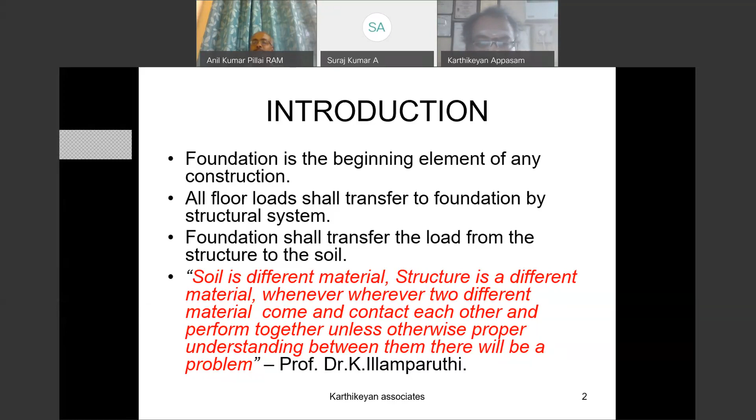How do foundations fail? Everyone does the Bhumi Puja with a lot of prayers while digging for the foundation and laying the foundation. The foundation laying ceremony is as important as the building inauguration ceremony. Nowadays, you may see most political leaders participate in foundation laying, stone laying ceremonies. So people are very serious about the value of foundation in a mythological and religious way. They make prayers on the foundations, but still there are some failures of foundations.

How does it happen? There are two types of failures that normally happen. One is geotechnical failure, that is failure due to the soil mass, failure due to the soil below the foundation, some volume changes, mostly compression. The other is structural failure of the substructure, which may not be designed sufficiently strong enough. So these are the two major causes of foundation failures.

Other than igneous hard rocks, most of the soil below the foundations is weaker than the structure. In structures, we are using units in megapascal, whereas soil is in kilopascal. 1 megapascal is equal to 1000 kilopascal. So the structure is a very strong material; soil is mostly a weaker material.

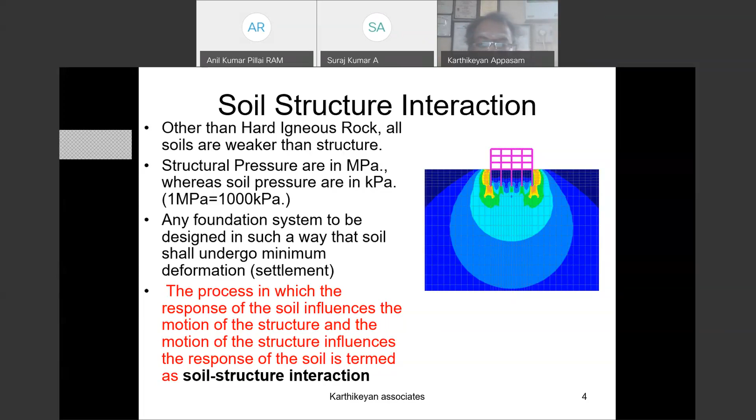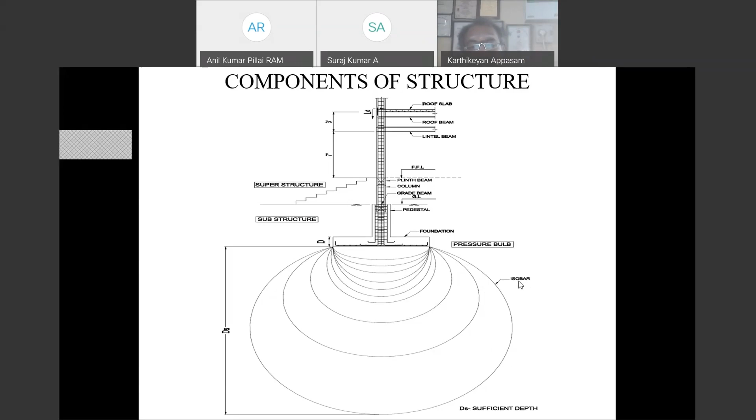These are all called lines. A single line is called an isobar. An isobar is nothing but a line joining equal pressure. Let us see what an isobar is. This is from a famous book, Joseph Bowles. Sorry for some little unclarity. It is a square foundation, normally a square footing, or a combined footing or continuous foundation.

You are standing on your shoes. If I put an egg below your shoes, when you touch it the egg becomes smashed. If you put the egg here, the egg is not disturbed. It is stable. Similarly, here the soil gets less stressed, with respect to depth as well as width away from the foundation.

The pressure is diminishing. In a colloquial way, if you go to any water body and throw a stone, there are rings around where the stone met the water. The rings gradually go away and then disappear. Similarly, when pressure is applied on the soil mass, the pressure is concentrated very high below and goes on diminishing: 0.9 Q, 0.8 Q, 0.6 Q, 0.5 Q, like that.

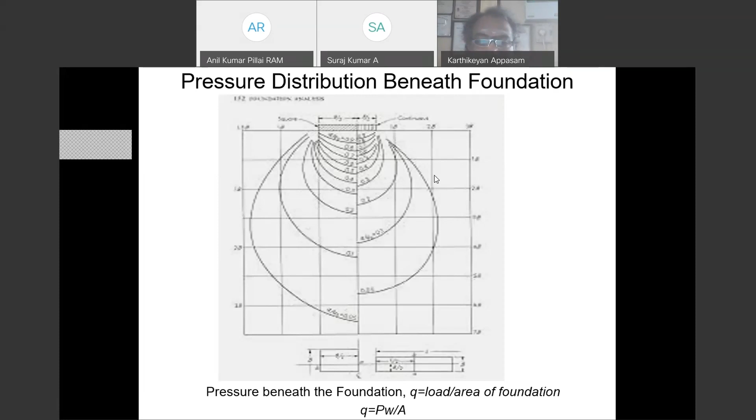Okay. Below the foundation something is there. You should understand below the foundation something is there. You should not touch that. Sometimes for sewer lines or water pipelines, for services, people may dig. If they touch these lines, there is a chance of failure of the soil. If there is a failure of the soil, there is a failure of the foundation.

Speaking about bearing capacity, what is bearing? Bear means support. Please bear with me, I am disturbing your afternoon nap. Please bear with me. Bear means take as it is. Support, carry the weight. Bearing capacity of soil means the soil has to bear the load acting on it.

See, the soil is undisturbed. A new person comes inside. Assume the current scenario, Ladakh. Ladakh belongs to us. The Chinese people come inside. Immediately, the responsive people is zone number 1. Our soldiers, our warriors, they resist them. Stop here. It is our land. You should not come here. They resist. This is zone number 1.

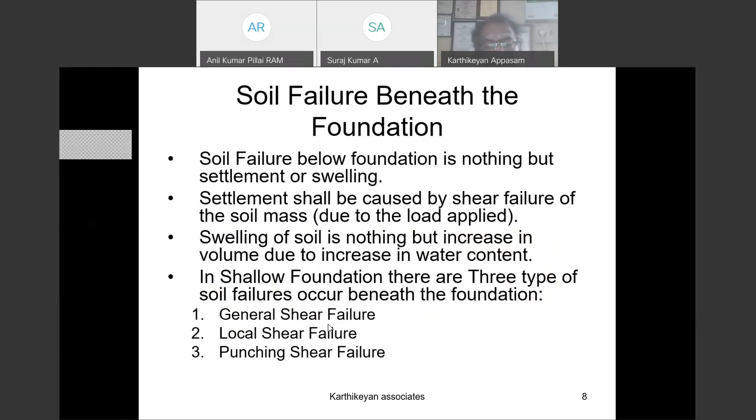There are three types of failures: general shear failure, local shear failure, and punching shear failure.

In general shear failure, this happens in a dense soil mass. The soil is very dense. What happens is the rupture of lines - these zone lines rupture, and due to the application of load there is a small, mild ground heave. When you plot the load versus settlement curve, at one stage there is a sudden drop. This is called general shear failure. In this failure, all the zones get displaced.

This happens when the bearing capacity reaches the ultimate bearing capacity.

See, I am a 95 kg fellow. If you give a 10 kg suitcase with gold, I happily receive it and walk firmly. If you offer me 20 kg gold, I say okay, come on, give it. If you give 30 kg, I bend, but then I take it. If you give 50 kg, still I don't collapse, but I yield like a coolie carrying it. So when there is increasing pressure on me, I go on deforming my shape. At one stage, when my ultimate capacity is reached, I collapse. This is called general shear failure - all the zones get disturbed.

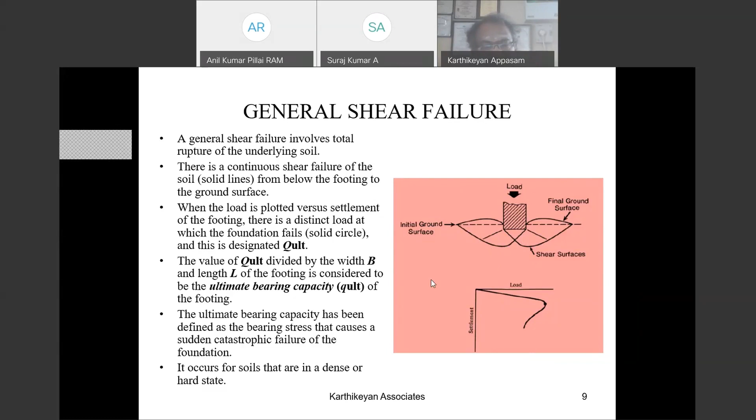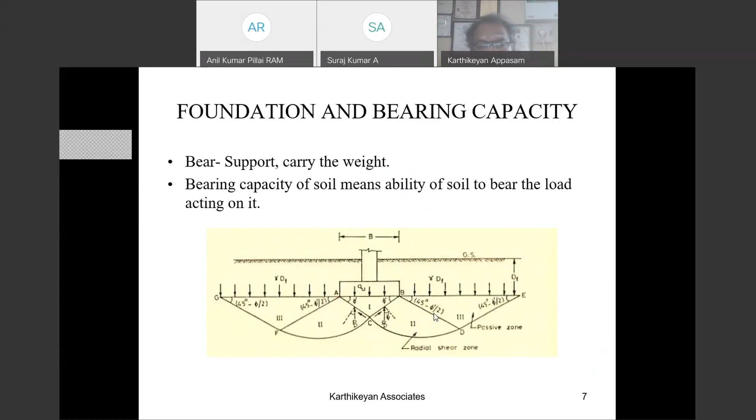There is another failure called punching shear failure. In loose or soft soils, when there is a load, these two zones become almost meaningless, and this zone punches inside the soil mass, causing unpredictable settlement of the foundation. So these are all three failures: general shear failure, local shear failure, and punching shear failure. If you want to avoid these failures, you have to strengthen these zones to avoid local shear failures, strengthen these areas to avoid general shear failures. When general shear failure and local shear failure are avoided, punching shear failure is not possible.

So far we discussed bearing capacity. Most structural engineers get the soil report - I'm sorry, most of them, not all - my fellow friends go to the last page and find the recommendation: what is the bearing capacity, at what depth? At 2 meter depth, 200 kN per meter square is the bearing capacity. No problem - load divided by SBC equals area, divided by square root gives the foundation size. But there is a very, very important thing: settlement.

Normally people ask, has your boy settled? Has the doctor settled? Settlement means people achieved some financially good status. Here, settlement is a negative word. In geotechnical and structural engineering, settlement is nothing but the soil moving.

There are three types of settlement. There is an IS code for settlement, IS 8009, 1976 - a separate code of practice to find out the settlement. This consists of three settlements. One is elastic settlement, that is immediate settlement. When you construct the foundation on the soil mass, there will be a settlement found out - that is immediate elastic settlement.

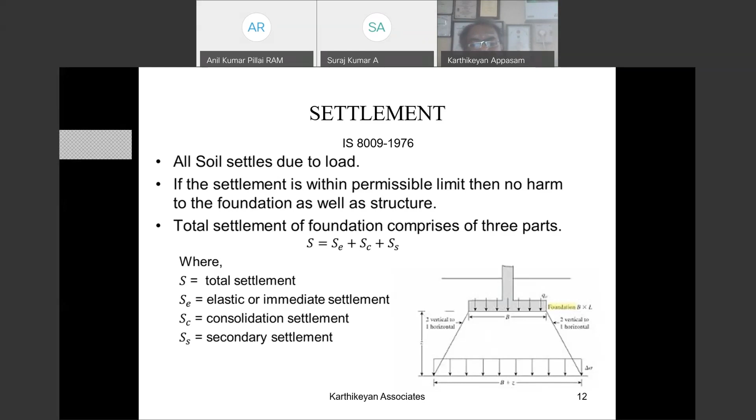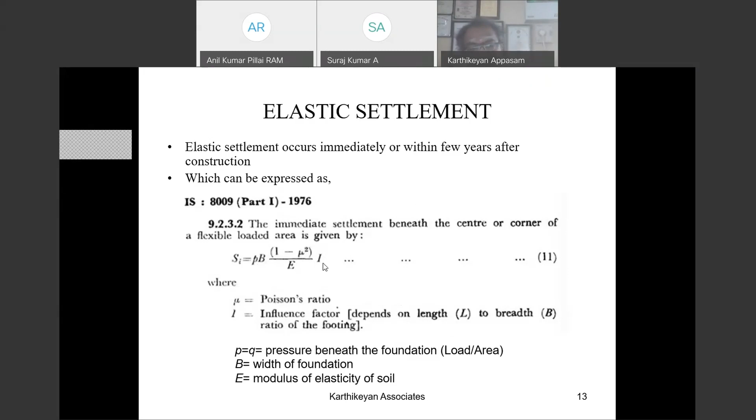Yes, these are all mathematical equations on how the settlement is calculated. This is the pressure, this is the width of the foundation, this is the Poisson ratio, this is the Young's modulus, and this is the influence factor. These values are given in Bowles book and other suitable engineering books, as well as in IS codes, depending on the type of soil, the Poisson ratio, the influence factor, and the Young's modulus.

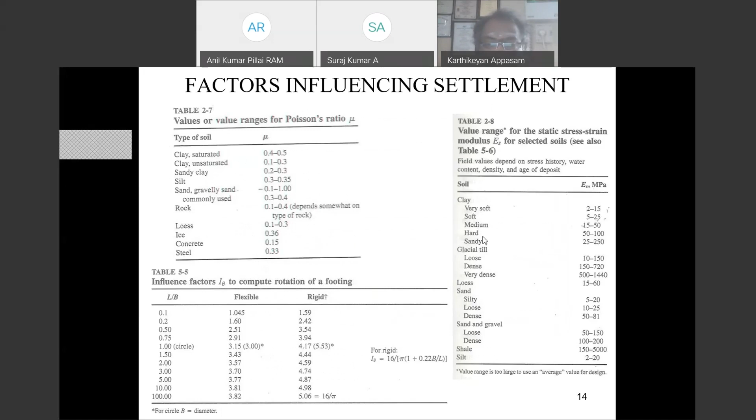For consolidated settlement, there is another equation, based on the difference on surcharge and additional pressure, the void ratio, and the thickness of layer, and there is a way to find out the consolidated settlement, depending on the compression index of the clay soil.

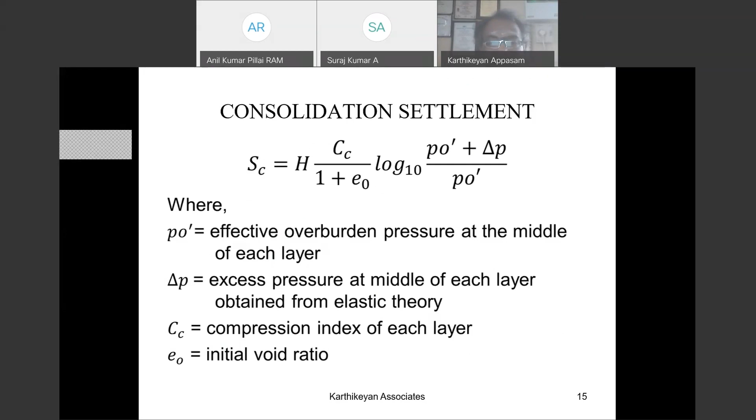So it is a long-term settlement in logarithmic scale, and secondary settlement is nothing but after consolidated settlement, there goes on further settlement of the soil. It takes years together, even it takes centuries. One of the best examples for secondary settlement is the Leaning Tower of Pisa.

All settlements are not dangerous. You cannot avoid settlement also. If you have a neatly ironed shirt or coat, if you wear it, there will be a deformation, but you are comfortable wearing that shirt and coat.

Similarly, when you apply a force on the soil mass, when you have a tight shirt, the stitches get teared due to your body pressure.

Similarly, there are a lot of columns in a building. If one column settles 20 mm and another column settles 25 mm, there are no issues, there is not much difference. But if one column settles 20 mm and another settles 50 mm, then there is a problem.

That is called differential settlement. If in one area all columns settle 10 mm, in another area all columns settle 20 mm, and in the last area all columns settle 40 mm, that means there is a tilt of the building. That is called angular distortion. The building may tilt, and that is where our problem starts.

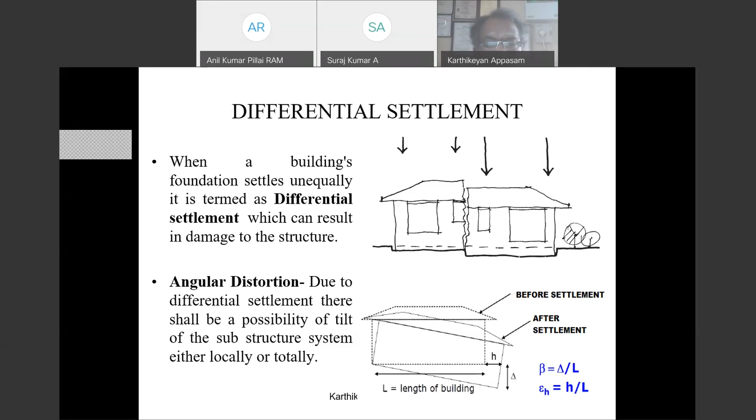So with these calculations, bearing capacity calculations and settlement calculations, how do we take decisions? The National Building Code also gives guidance about what type of foundations, either isolated footings or raft foundations, depending on the type of soil, sandy or clay, and the type of structure, whether steel structure, reinforced concrete structure, or multi-story buildings. There are allowable limits given.

We cannot avoid bacteria and virus in our life. If you have ice cream, you are eating bacteria. If you have cold water, you may consume virus also. But unless your body immunity is within fighting tendency, you don't have a problem.

Similarly, if the settlements are within limits, if the differential settlements are within limit depending on the length of the building, for example if it is a reinforced structure, 0.0015 L of the length of the building, the settlement is within limit, there is no problem.

If there is angular distortion, the tilt is within 1 in 300 for steel, 1 in 500 for RCC, then no issues, depending on the type of soil, type of substructure, type of structure, and length to height ratio. There is a table given in clause 7.2.3 and table 3 of the National Building Code 2016, very beautifully given.

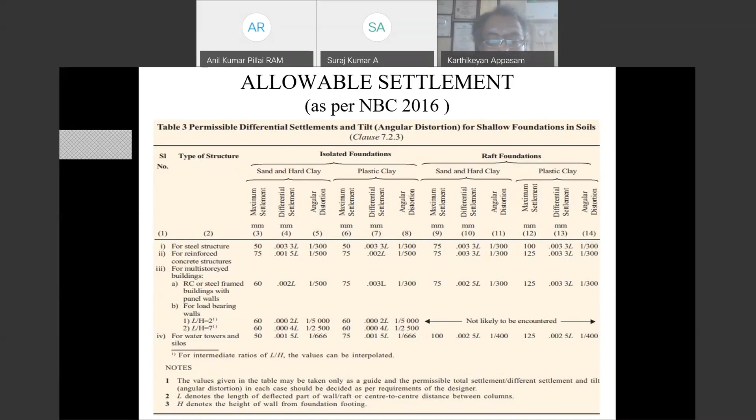Other than settlement, there is another hectic, challenging, headache issue for civil engineers, nothing but expansive soil. India is an agricultural country, and 70 to 80% of our population are in villages.

Most of the villages are surviving by paddy fields and sugarcane fields. Okay, it is very good news for the farmers.

We have a wide range of clay soil bed, at least 2 to 3 meters of topsoil or clay soil, in most of our Indo-Gangetic plain, Kaveri belt, Godavari belt, and Satpura belt, where we have plenty of agricultural clay soil with 365 days of sunlight. That is why we were invaded by foreigners for centuries. We can get yield, it's very good news for agriculture, but it is a headache for civil engineers.

As I said earlier, when water enters, the soil swells. Why does soil swell? Clay soil particles are less than 2 microns, where 1 micron is 1 by 1000 mm. When water slowly permeates into the soil mass, the clay allows water to occupy the space between particles, and the volume slowly increases. At one stage, it increases vigorously, and there is an increase in mass volume. When it is without water, it is like this; when moisture permeates into the soil mass, it swells like this.

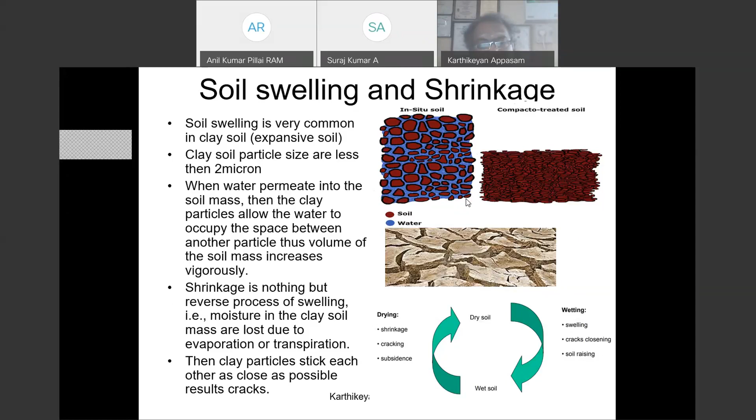If you construct a building on this soil, what happens? If there is drying, there is shrinkage, cracking, and subsidence. If there is wetting, when the monsoon starts, swelling, cracks closing, and soil rising happens. As a result of swelling and shrinkage, when swell pressure dominates the foundation pressure, the foundation may lift up or tilt.

Shrinkage is nothing but loss of moisture, the volume shrinkage, and it is dominant around the contact area. The contact area is nothing but the foundation. When the contact area shrinks, the foundation settles.

So in monsoon time, the soil swells; in summer time, the soil settles. Swells, settles - what happens? That is called fatigue. If you take a paper or a metal sheet and bend it like this, at one stage the fatigue reaches a threshold, and there are unrepairable cracks, sometimes even collapse of the structure.

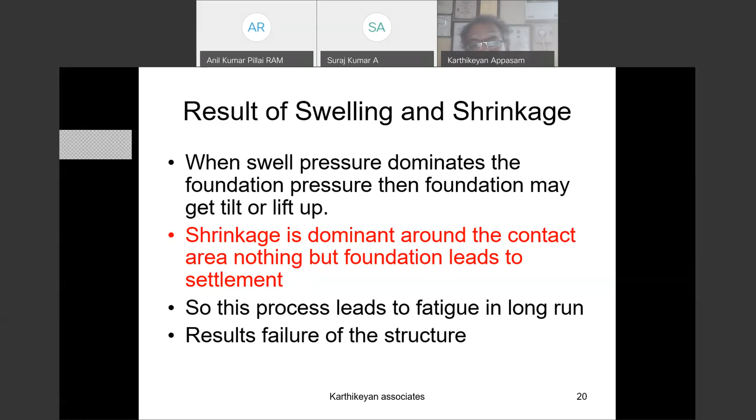How does soil swell? There are parameters. We people have diabetic scales - if fasting sugar is more than normal, or PP sugar is more than 160, 180, 190, 200, you are marginally diabetic. If more than 200, you are diabetic. More than 300, you are uncontrolled diabetic. Doctors say this and give insulin to patients accordingly.

Similarly, if the liquid limit is more than 40%, the plasticity index more than 18%, and the free swell index is beyond scale - structural engineers, my fellow friends, don't study only the recommendation part, please study the index properties table. Liquid limit minus plastic limit equals plasticity index, and the free swell index - if it is beyond the scale, even though the bearing capacity is good, be careful.

You may need a ground improvement technique, because when the soil test is conducted in summer, your N value is different. When the soil test is conducted in November or December, your N value may be different. So don't trust only N values and bearing capacity - try to study the soil parameters also.

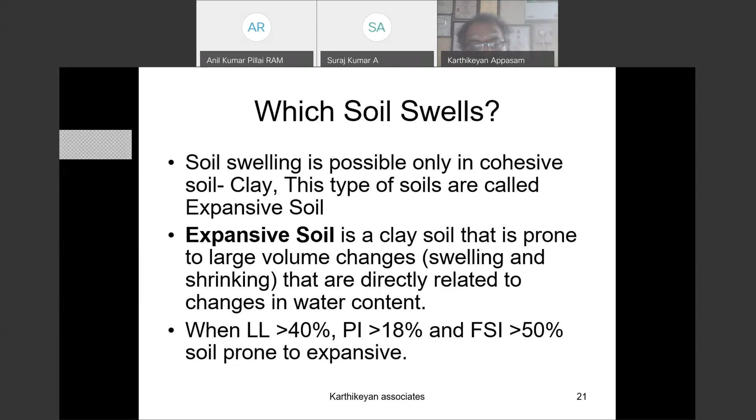How to solve the expansive soil problem? Advertisements say 'very near to Chennai', 'very near to Coimbatore', 'very near to Hyderabad', 'very near to Vijayawada', 'very near to Kakinada', 'very near to Delhi' - for real estate. That means those areas are paddy fields, mostly paddy or sugarcane fields, where the chance of clay soil deposits is more. Rates are cheaper, so people go and purchase the land.

After purchasing only, they come to know what type of soil it is, when they go for Bhumi Puja or for soil testing. Our olden days' Bhumi Puja is also one type of soil test. What they do is excavate and pour water. If the water does not permeate, the soil may be clay soil; if the water permeates, it is sandy soil - a simple test. And they put some stem on the pit - I wonder why the puja is performed with the stem. That is a cone penetration test of those days.

If the cone penetrates easily into the soil mass, be careful. If the cone does not penetrate even with water content, the soil may be good. So most of our Bhumi Pujas are also soil tests.

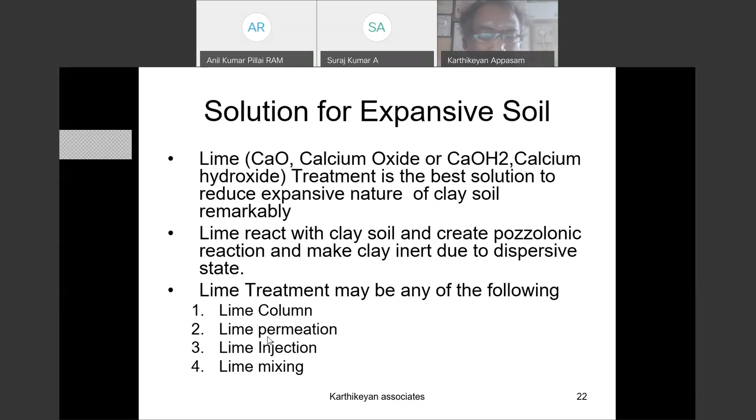Lime can be added to the soil by these methods: lime column, lime permeation, lime injection, and lime mixing. This is one of our sites, in Chennai, Perambur; it is a clay soil belt. Over that, a ground plus 3-story building was going to be constructed, with a load of 70 to 90 tons applied on the soil mass. There are two options: either we go for pile foundations or we go for ground improvement.

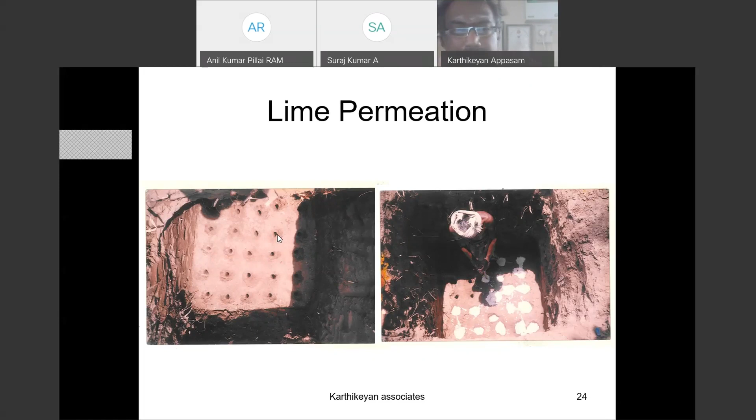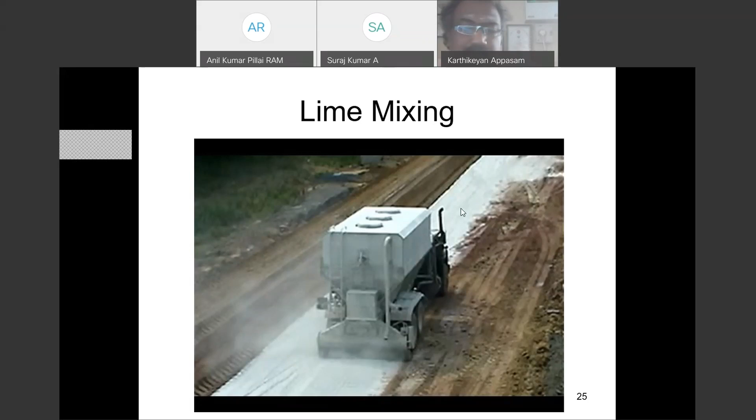And lime mixing: in highway projects, for kilometers of land, you may have clay soil. So with containers like these, you spread the lime emulsion, mix it with the soil, roll over it, and then leave it for curing. In highway projects, lime mixing and lime injection are also used.

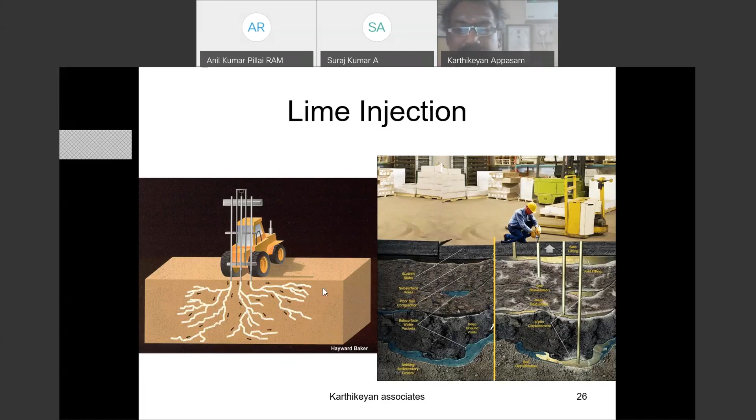Lime injection is a little bit costlier compared to the previous methods. But when the building or the highway has settled, you have no other option than injections. Here are some specialized tools to puncture the soil, and then under controlled pressure they inject the chemical solution, mostly lime or lime mixed with fly ash. It permeates inside the soil mass, solidifies, reacts with the clay soil, reduces expansivity, like reducing the plasticity index, hardens the soil mass, and doesn't allow it to settle and swell further.

So far we discussed the problems of expansive soil, clay soil. Now let us go into the foundation part. How does a foundation fail? Improper design or improper construction. The third one is not in our hands: natural calamity. We can predict it to some extent and then design conservatively.

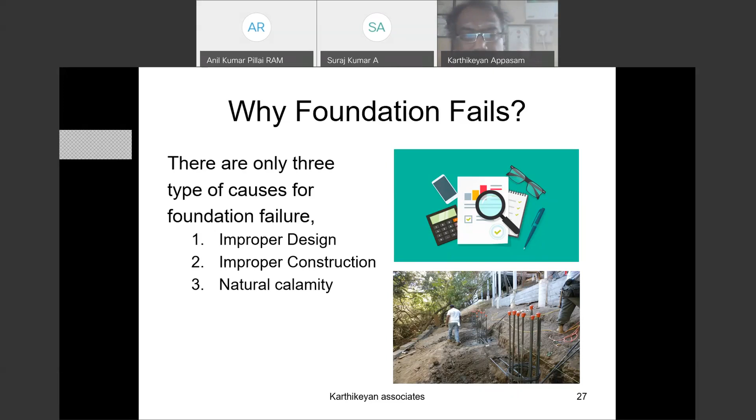What is improper design? Lack of soil test. People pay lakhs and crores of rupees to purchase the land, give money to the approval authority as fees, and sometimes some things other than fees also, and are not ready to pay for the soil test. Even now, when we design a ground plus 3-story or 4-story building and structural engineers insist on a soil test, most clients innocently or ignorantly ask, sir, whether it is required.

It is a matter of 20,000 rupees to 50,000 rupees. But the land cost is in crores, lakhs. Building cost is in lakhs and crores. For a 4,000 rupees mixie, there is a guarantee card. What is the guarantee card for your site? Your soil test is a guarantee card. So do the soil test.

Lack of detailed soil report. Last week I received a report. They did it up to only 6 meters. Even at 6 meters, the soil does not have a good N value. I scolded the contractor and the client side engineer. Why did you stop at 6 meters? Sir, if you go for 10 meters, the soil consultant asks more money. See, penny wise, pound foolish. I'm sorry to say this.

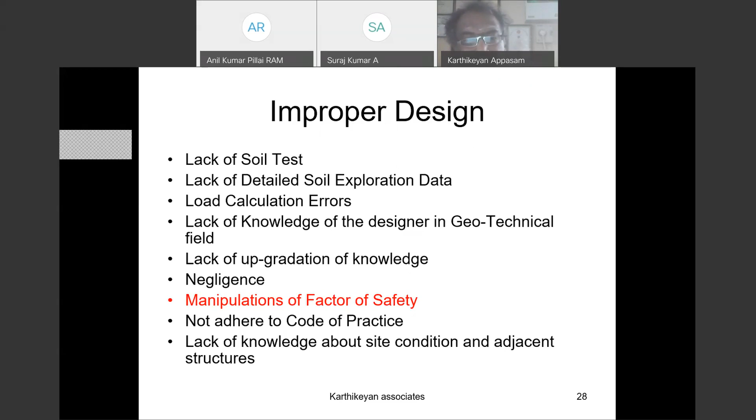And after improper design, there is improper construction practice in foundations. This improper construction practice happens during earthwork excavation, erection or installation, or during the construction of foundations. There is improperness in two ways.

Yes, there is a lot of improperness, lack of skilled laborers. Nowadays, people are facing a very big problem of migrated laborers. Most of the laborers went away to their native places, from North India, from South India, east to west, north to south. Their laborers went off. Skilled laborers are not available to carry out the business. So, lack of skilled laborers is the first criteria.

Lack of proper methodology and tools. For pile foundation, there is a separate methodology. For auger pile, there is a separate methodology. For driven pile, there is a separate methodology and tools. And lack of proper formworks. Whatever the type of cement you use, whatever type of steel you use, the formworks are not proper. There is a lot of waste of materials.

Okay. And technical supervision. At most of the sites, technical supervision means you have to appoint a supervisor, that's all. But the supervisor should be trained. He should be strong enough to study the slump, strong enough to study the soil conditions, strong enough to check the reinforcements, strong enough to check the cover blocks. The technical knowledge of supervisors is also very much emphasized, not simply putting a person and blaming him for any mishaps that happen.

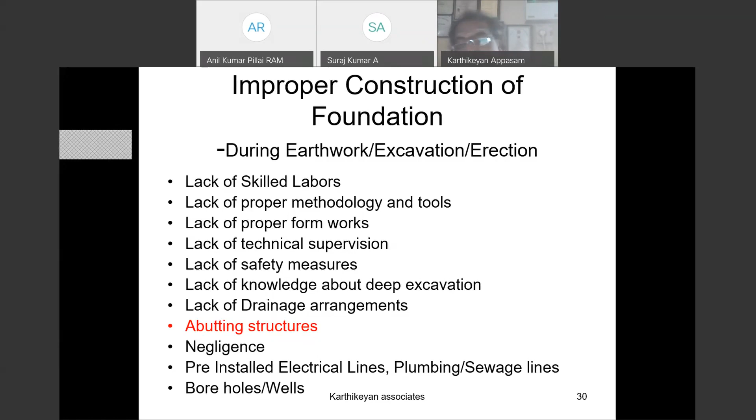And improper construction practice, not maintaining proper water cement ratio, is a very big challenge in most constructions. We design M25 or M30 or even M40, but people are still struggling to achieve M20. Okay. Because there is no proper water cement ratio maintenance at site.

One of the most awkward scenarios we found is this fellow very nicely fabricated the steel, the pedestal, the column, everything. But he put bricks instead of cover blocks. At one site, I scolded people: don't put bricks, use cover blocks only. The next day he put fly ash blocks. He argued that also is grey color, this also is grey color. Color is not important, content is important. Because when you put concrete on this, the bricks get crushed. When the bricks get crushed, there is a chance of moisture ingress, and then the reinforcement gets corroded.

And use proper thickness of cover blocks like this. If it is a foundation bottom where PCC is provided, you have to use 50 mm cover blocks, and the sides are 75 mm covers. So use proper cover blocks. Avoid these types of brick bats, or other materials, and not properly compacting. Okay.

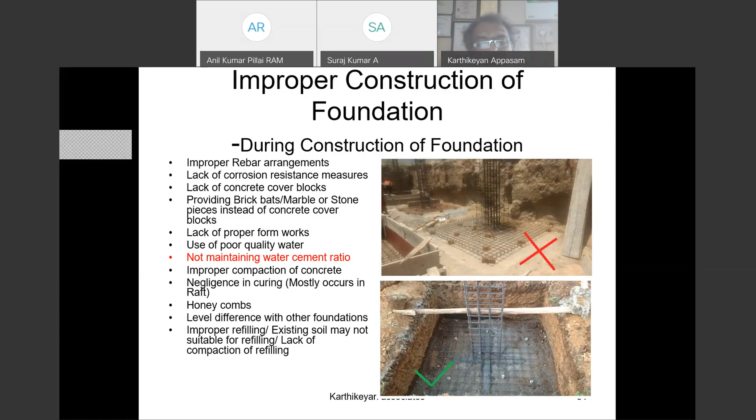And they do not properly cure the foundations. Roof slab and all, they could properly cure, but foundation curing is not properly given. And there are honeycombs, and they are very negligent. These are all the improper construction practices in foundations, and improper rebar arrangements.

For isolated footings, avoid lappings, because all the isolated footings are cantilevers. So don't try to save material by providing some laps; be lap free. And there is a development length. There are two types of development length: one is compression development length, LDC, and then tension development length, LDT.

Mostly compression development length is 38 times the diameter of the bars to 40 times the diameter of the bars. And tensile development length is 50 to 60 times the diameter of the bars. So that should be provided. You have to check for punching shear and one-way shear. At the same time, check for the LDT and LDC also.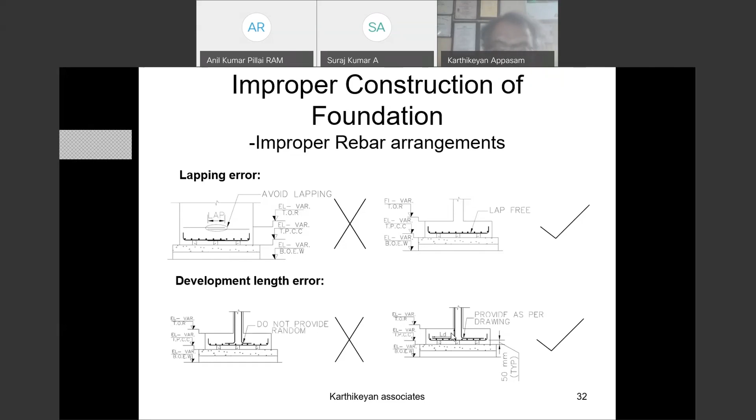And another most important thing is, once a foundation is cast and refilled, unless some mishap happens, no one is going to excavate the foundations. So it is lifelong maintenance free. It is better to use corrosion resistant steels. Corrosion resistance means you can use CR steel, corrosion resistant specialized steel as per IS 11587, or you may use epoxy coating like fusion bonded epoxy, or at least zinc chromate coating.

And while making concrete, use a corrosion inhibitor like Concare, a Central Electrochemical Research Institute product. It's very cheap, 50 rupees per bottle. You mix it with the cement and make the concrete corrosion free. Preferably use PPC or slag cement for foundations. If it is a corrosive environment due to sulfur content in the soil, go for sulfate resistant cement rather than OPC.

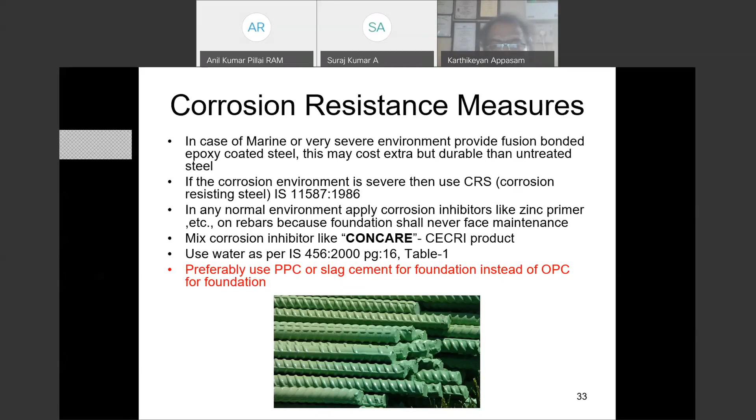And provide proper formworks. If section engineers give a foundation size of 1.5 meter by 1.5 meter, some contractors excavate exactly 1.5 meter by 1.5 meter. They don't give additional leverage, but they have to go at least 1 feet around the foundation so that they can put proper formwork, pour the concrete, and properly compact it.

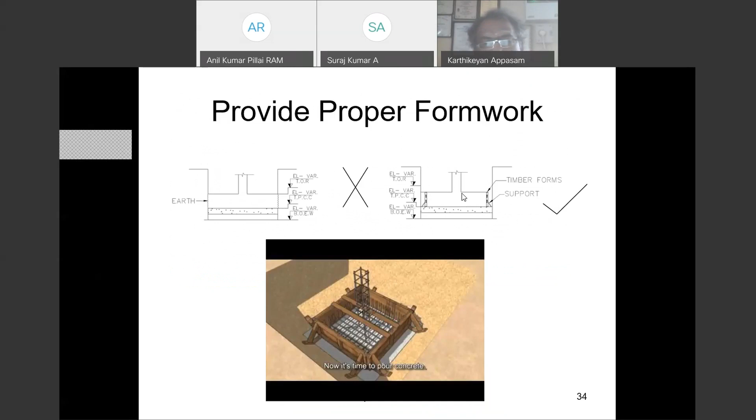And the use of good quality water is very, very important. IS 456 Table 1 speaks about water, because water is a very important thing. Even if you use good brand cement, Ramco cement or any other, and good steel, Tata Steel, JSW Steel, if your water is not as per quality, there is a chance of disintegration of concrete due to harmful materials. So be very careful with sulfur and chloride. Not only the soil test, the water test is also much emphasized.

The sulfate content shall not be more than 400 ppm. For chloride content, if it is PCC, 2,000 ppm; if it is RCC, 500 ppm. I gave this chart to your site engineer to test the water.

Stick to it. The site engineer is my friend. He scolded me: you people are sitting in AC rooms giving reports, how can we maintain the site? A few days later we met him in a hotel. He was taking some hot drinks, and I asked him: you are mixing Aquafina or Kinley for the hot drinks, for a matter of half an hour or one hour's pleasure. Think of a lifelong building, what type of water is required. So use good quality water. He was scared.

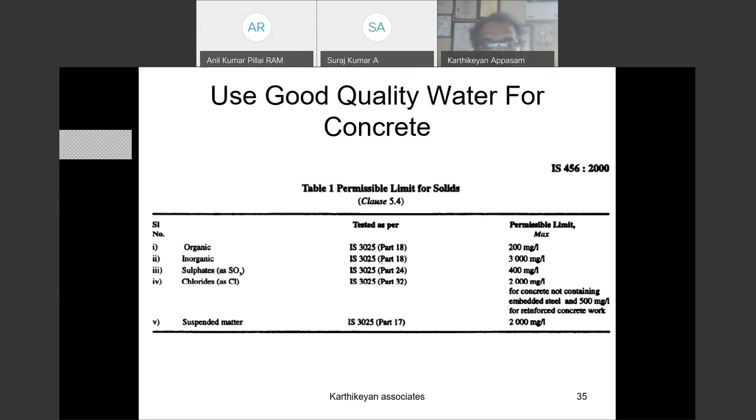And as we already discussed the lack of proper water cement ratios, the slump cone is a matter of 2,000 rupees. Hardly 10% of my sites use slump cones. When the cube strength is not achieved and we start scolding our contractors or site engineers, they say, sir, we did it very nicely, I'll show the video. We don't want video. Have you checked the slump values? Most of the people don't know.

IS 456 Table 5 gives the minimum cement content and the workability. If the slump is shearing, don't use the concrete. Remix the concrete to achieve the proper slump. If the water cement ratio increases, definitely the strength reduces.

And lack of compaction. In roof slabs, people worship and then very seriously they are doing it. But for foundations, and even mostly on columns, people are not giving proper importance. So if there is no proper compaction, the strength may not be achieved. Nowadays self-compacting concretes are coming. In spite of that, you ensure the concrete gets compacted properly.

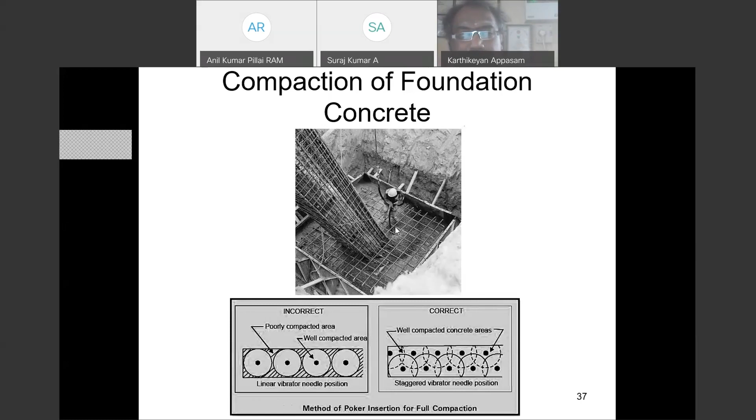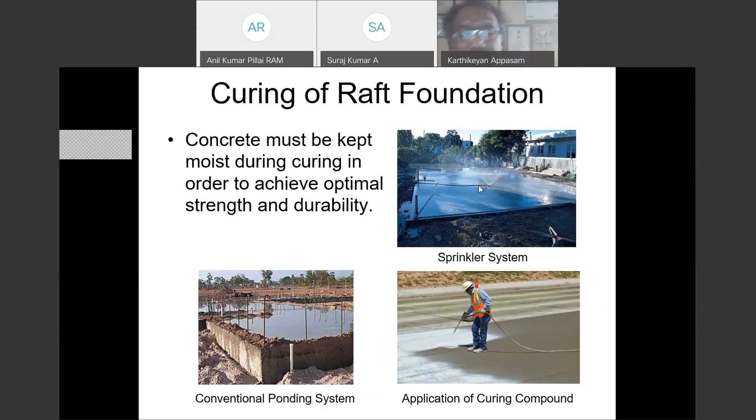After compaction, curing. When there is a raft foundation like this, you may use a sprinkler system, application of curing compound, or the conventional ponding system. You want to give some curing at least for 7 days, and then you construct further. Honeycombs are prohibited in foundations because foundations are maintenance free all over the life. So be careful. If honeycombs come, you have to very cautiously, very conservatively treat these honeycombs with the proper chemicals. Don't simply plaster it.

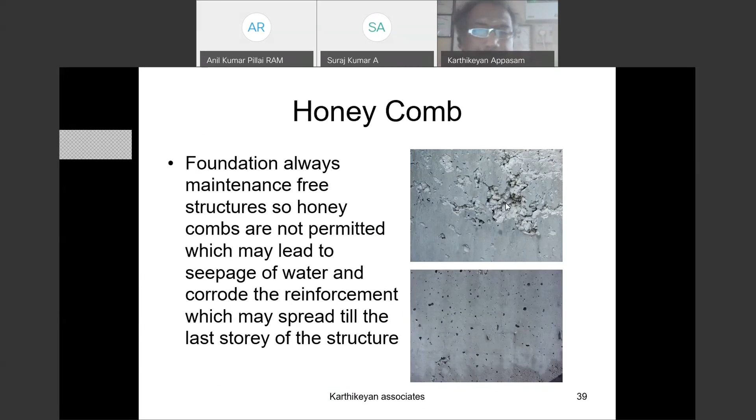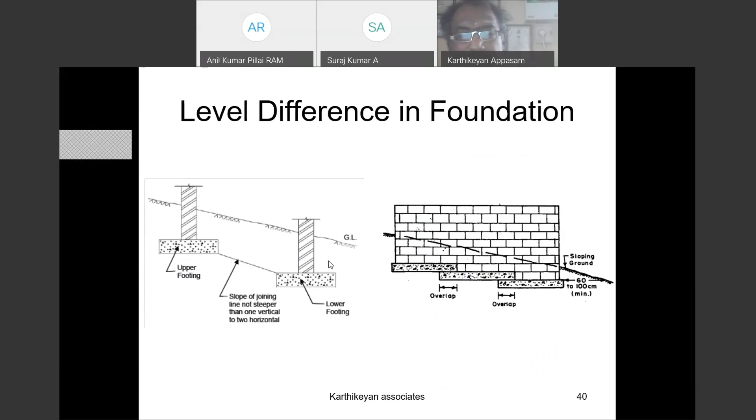In one of our sites, the roof tiles were continuously cracking. My friend, a fellow engineer, went on changing the roof tiles, weathering course tiles. After some time, there were diagonal cracks on the superstructure also. Then at last we found the roof tiles were cracking because of uneven settlement.

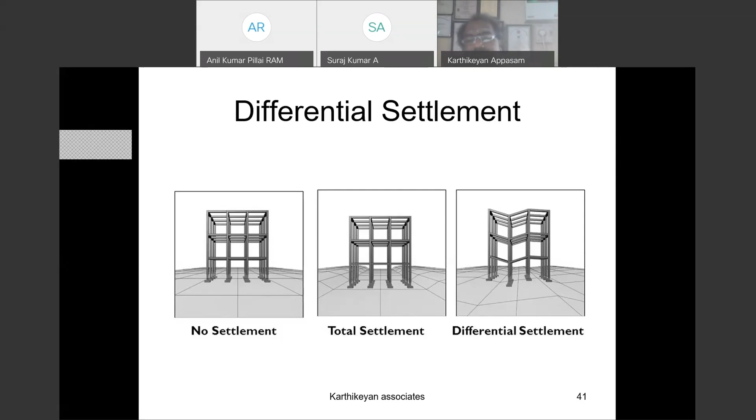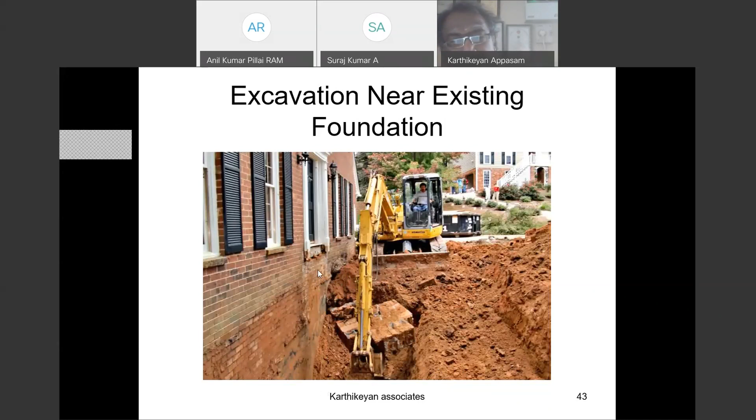And people are excavating near the foundations. When they touch the pressure bulb lines, then this building may be unsafe. So be very careful. When you are in such conditions, you have to properly shore it. You have to give sheet piles. Better give contiguous piles. Spend some money on this, and ensure there is no settlement or lateral movement. Then you go for further excavations.

And refilling. Mostly people excavate and then construct the foundation. They do proper foundation and all. If there is clay soil, don't refill the same soil. If no other soil is available, then compact the clay soil along with lime and quarry dust or some non-swelling soils mixed together, and ensure that the clay soil will not swell further. So this note is very important: well compacted non-swelling soil for refilling of the foundation pit as well as for the plinth.

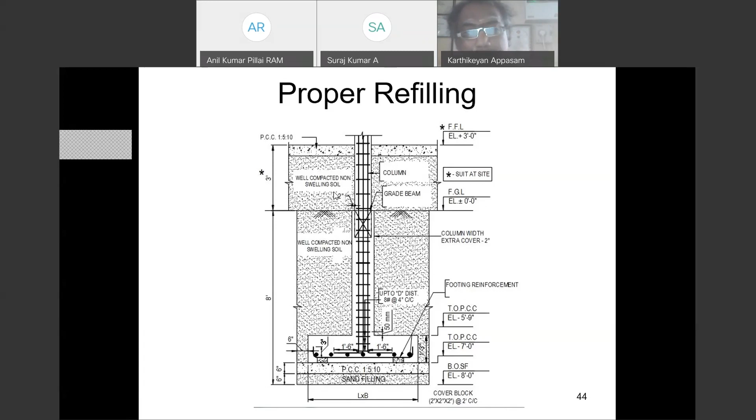This is a very common scenario in some outer yards and car parks. Due to swell-sink, if the soil is not well compacted, non-swelling soil, it may sag or it may swell, heave like this.

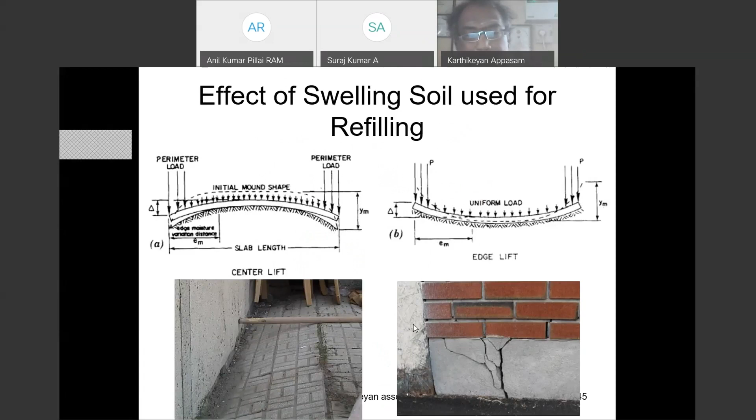And liquefaction is due to earthquake. There is a sudden movement of the soil due to shock when there are saturated conditions. That is liquefaction. That is a very big area. And due to wind and cyclone, if the foundations are not designed for lateral loads, there is a crack on the foundations, and then the foundation may get tilted. These are all natural calamities. You might have seen in Uttarakhand a few years ago, some buildings got eroded due to scouring actions.

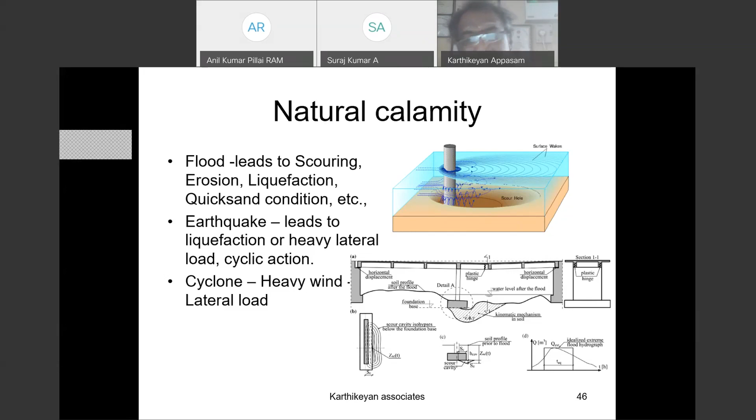Here, again, I recall Dr. Illamparuthi. In any business, there is a vendor, there is a client. There is a middleman who also plays a major role. Foundation is an intermediate element. It's like a middleman. In any business, the middleman role is a very important role, whether purchase of a plot or purchase of ammunition. The middleman is the agency going to deal with client procurement and producer requirement. Similarly, here structure, here soil. Foundation is the middleman. So unless the middleman is strong enough to understand both people, the business will not be successful.

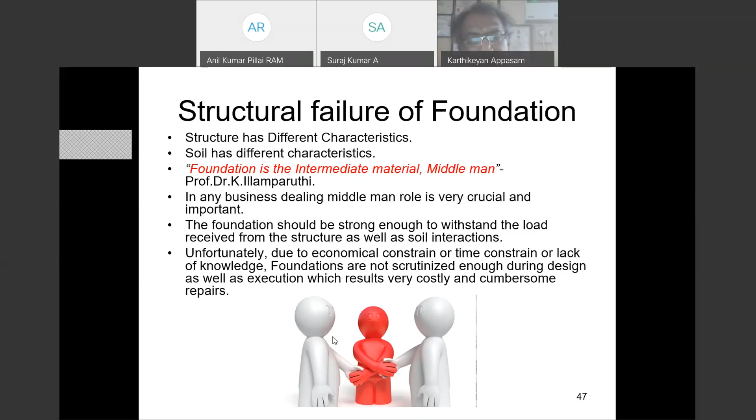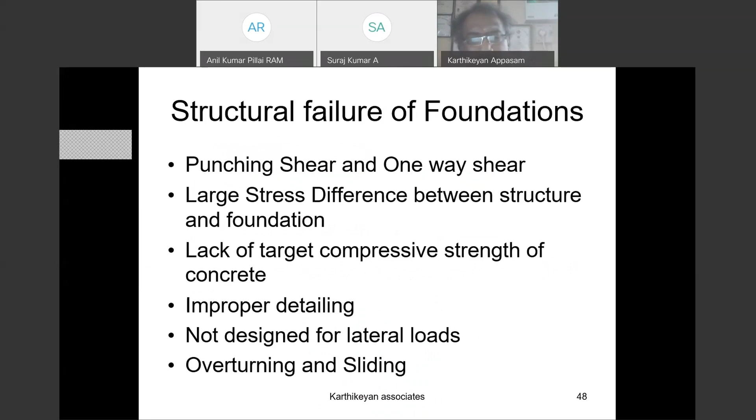Unfortunately, due to economical constraints, people give less importance to the foundations, and sometimes innocently they make some mistakes. They do not properly go for scrutiny of design and then execute. So this leads to structural failures of the entire structure. Structural failures of foundations: we already discussed punching shear and one-way shear, things about the soil. Now, punching shear failure also happens in foundations where column and foundation meet.

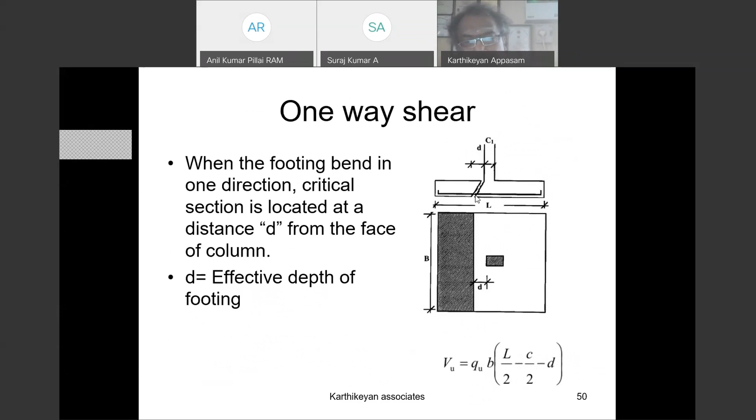There is an equation given, and there is a one-way shear. Due to bending, there is a chance of shear crack at a distance from the column, and in some cases soil bearing capacity is very poor, even less than 100 kN per meter square.

Column face is one thing, say 230 mm by 300 mm or 350 mm, and the foundation is 4 meter by 4 meter. Some designers give it like this, but IS codes, IS 456, page number 65, clause 34.4 gives A1 by A2 square root not greater than 2, where A1 is foundation area and A2 is column area. So A1 divided by A2 square root cannot be more than 2. If it is more than 2, you have to introduce a pedestal. If there is more punching stress possibility, there also you can introduce a pedestal.

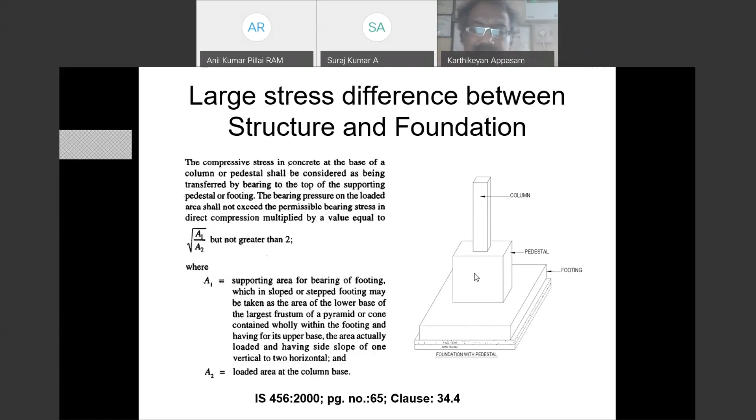And as we already discussed, if buildings are not designed for lateral loads, there is a chance of tilt due to horizontal pressure, either due to wind or due to seismic action, or even sometimes extraordinary temperature conditions.

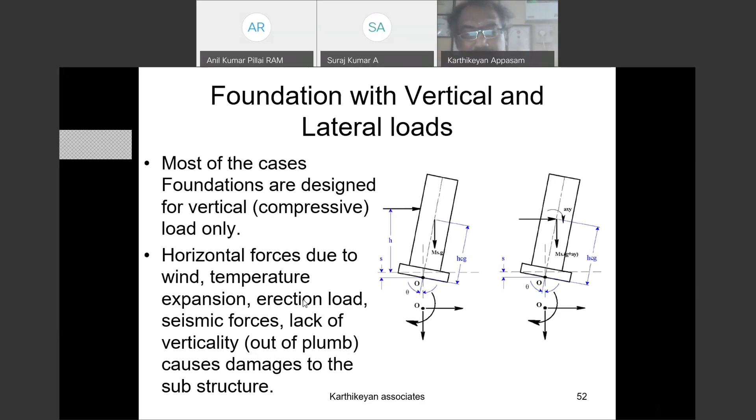Then the structure goes out of plumb, and that makes the structure fail. Prevention is nothing but the engineer in charge's responsibility - not only the design engineer's responsibility, but also the site engineer's responsibility. If a site engineer has some small doubts, he has to bring it to the design office. Don't just construct whatever drawing is received.

In one of the sites, the design engineer gave the drawing saying minus 2 meters, the foundation should rest. At one place, minus 2 meter is rock. At one place, minus 2 meter is silty clay. If you excavate 1 more meter, there is a chance of rock. But the site engineer blindly followed the drawing and at 2 meters put the foundation.

That's all - so uneven settlement happened, and we had to repair it in a very costly manner. So scrutinize the soil exploration report as well as the foundation drawing, because soil exploration is taken at one point in time. While excavating, if there are any changes, you have to report to the designer and redesign.

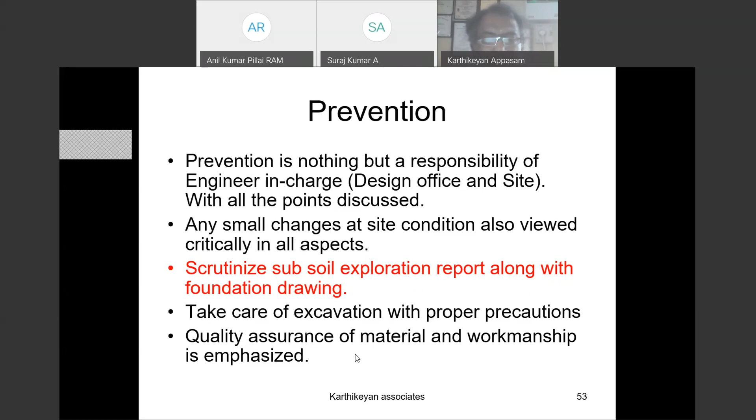And take care of excavation with proper precautions, as we already discussed. And the quality assurance of materials and workmanship is emphasized. These are all the preventions.

And yes, remedies are possible, but it is very cumbersome and costly. You've got to spray the money, not just spend the money - like a king spraying money while enjoying parties. Like that, you have to spend the money.

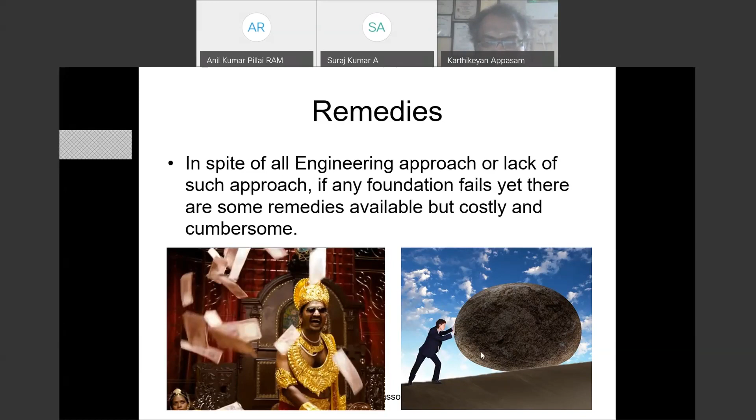Because foundation rehabilitation is very costly, it's like the cartoon where one man is holding a rolling rock. So when you go and touch the foundation, you have to be very careful - sometimes anything happens and the person near the foundation gets crushed.

One of the prevention methods is the ground improvement technique. You can compact the soil, you can introduce stone columns, you can preload, you can give lime treatment. As already discussed, compaction is the easiest and most economical way.

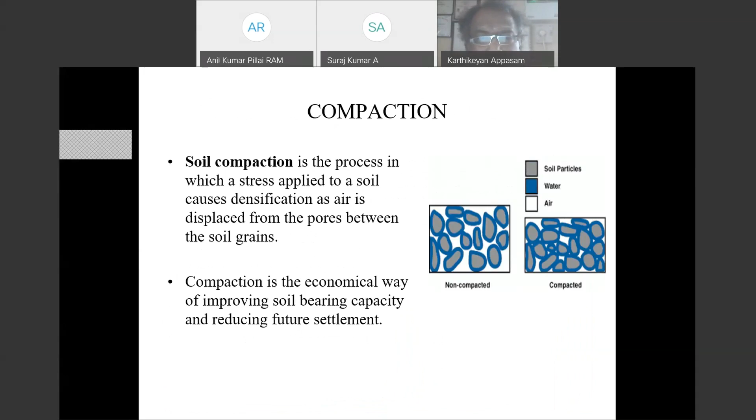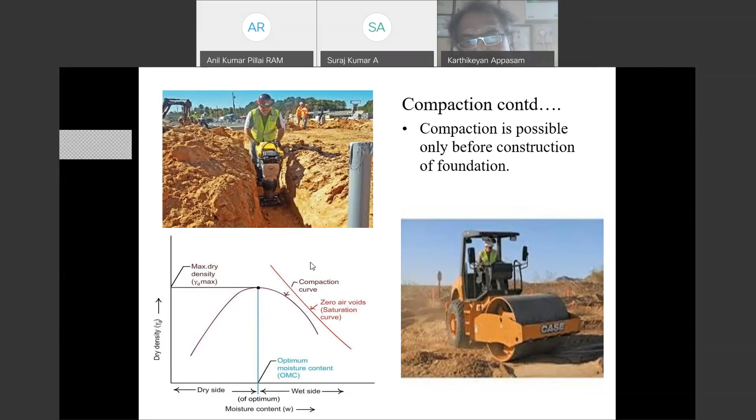Unless it's a cohesive swelling soil, you can simply compact using vibrators - you excavate and vibrate. For a large area, when you go for raft or road works, you go for rollers. Then compact according to the OMC curve - you compact a little bit wet of optimum, and then even with some loss of moisture, you don't lose strength. Compaction is a very possible and easy construction methodology in ground improvement.

And for stone columns - if you have a two-wheeler in monsoon time and you park it on the ground using the side stand, many people experience that after some time the two-wheeler gets toppled because the soil gets wet and becomes loose and soft, and the stand goes inside. It is a foundation failure, but on a small scale.

You can lift the two-wheeler and take it away. But if it happens to a building, what happens? For the two-wheeler, how to avoid such things? Below the stand, you put a small stone - the two-wheeler will be safe. Similarly, this is a conventional colloquial example.

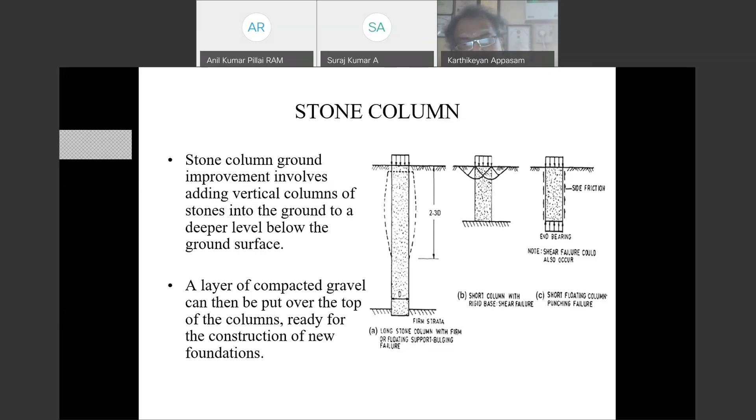If you are putting stones which are stronger below your foundations, it is a pre-construction method - before construction of the foundations, you have to put some stones. These stones are nothing but 40 mm jelly or 60 mm blue metals.

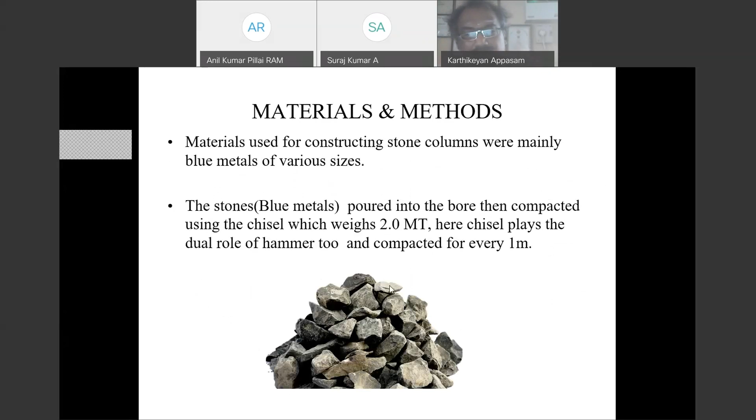Normally, this is the construction methodology. First, there are advanced methods also available in big companies, but the conventional method is like a pile. You make a casing, or without casing, you make holes. On the holes, you pour stones and compact using hammers at equal intervals, and again pour the stones and compact. This is normally 2 to 3 times the diameter of the hole, and then at equal intervals, if you compact it, over that you can construct normal foundations.

Then settlement is very much reduced. This is much cheaper than pile foundations. Many buildings we constructed, ground plus 4-story buildings, even though soil recommendations were for pile foundations, we compared. If we designed for pile foundations and also designed for stone column with shallow foundation, we compare the statements. If there is more than 50% savings on the foundation cost, we go for stone columns. There is a lack of awareness and some apprehension about whether it will stand like that, so people don't go for stone columns, but it is a cheaper and very reliable method.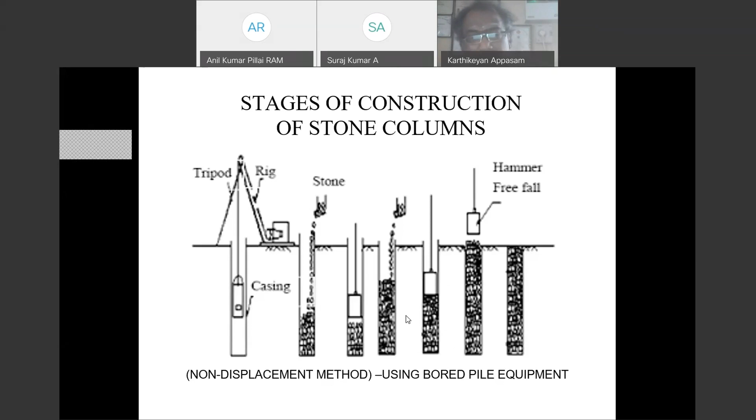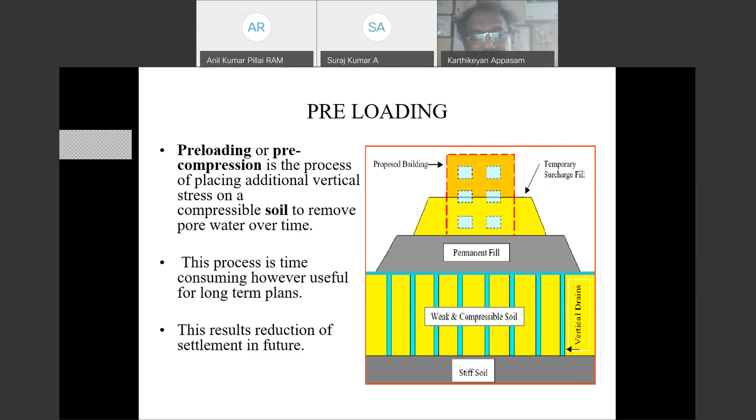And preloading, this is very time consuming. But in case of a large scale project like AIIMS, today they construct one block, after a few years they construct another block, after 10 years they construct one more block. So we know which one is the last block going to be constructed. You load the construction materials at a particular area. If the soil is compressible, you can make some holes and put in sand. Then you can improve the soil permeability, and then you load the building materials. So they squeeze it, and the soil gets naturally compacted. After that, again test the soil and then construct the building. This is one of the easiest methods, but it is very time consuming. The preloading method.

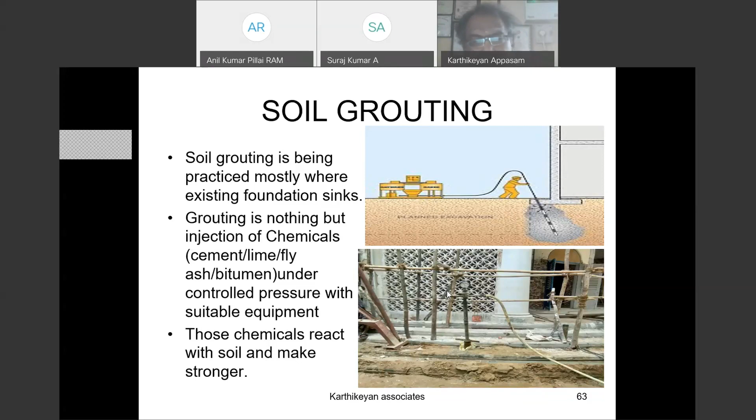This is our site diagram, a 100-year-old building in Chennai. We do inclined drilling and then put in an emulsion of cement, inserting it into the sandy soil, silty sand. We pressurize with controlled pressure and penetrate below the foundations, and then solidify the soil. We don't allow the foundation soil to settle. This is a costly method, but if there is a settlement, there is no other way we may go. It is comparatively a costly method.

People think only shallow foundations settle, deep foundations do not settle. That is a myth. Sometimes if the deep foundation is not set properly, the piles are not concreted properly. This is one of the beautiful buildings. Here is a grouting and drilling equipment. We grouted around the pile. The pile is at a depth of 6 meters. We grouted out to 14 meters. The soil is very weak.

The contractor mistakenly stopped the pile at 6 meters without a soil test. The contractor put a 300 mm diameter pile. I asked the contractor, why did you do the pile this way? He said all nearby people are putting pile foundations, so I was also putting a pile foundation. So pile foundation is a fashion in some areas.

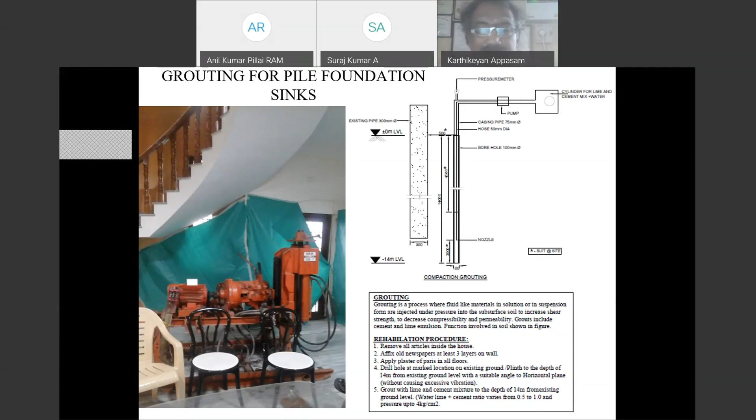So go by the soil's N value, but the top N values are more than 50, whereas he stopped the pile where the N value is 0. So he brought all the load and brought it to the looser state. We grouted around the pile, and we are still studying it. There is no further settlement, so the client is happy, but it is very costly. Sometimes pile foundations also settle.

Enlarging the size of the foundation. If you zoom into these slides, this is the existing foundation, 2.5 meter by 2.5 meter. While we designed it, this is a factory building, and they are going to overload the factory. When they overload it, the foundation size requirement becomes 5 meter by 5 meter, almost double the size, from 2.5 by 2.5 to 5 meter by 5 meter. So this is the existing foundation. We drill the holes and then rebar using Hilti chemicals.

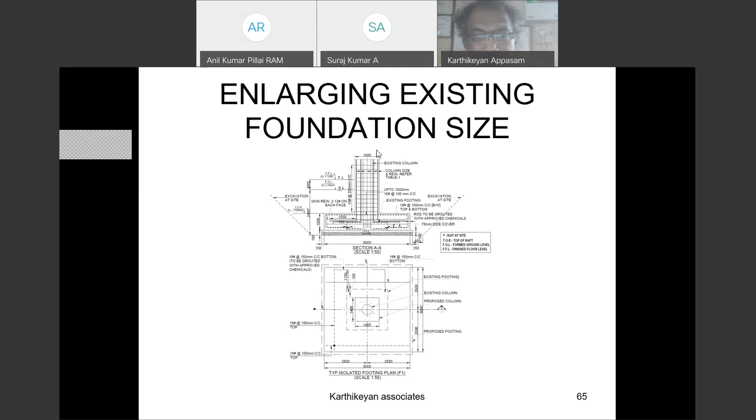I'm not sure either Hilti or Fosroc Lokfix. They did it and then put the rebar - this is the original column and this is the additional column. If you see the side photos you'll understand better. This is the existing foundation we excavated, then we drill holes, insert the rebars and grout, and around the existing column we put the additional column. Then we concreted.

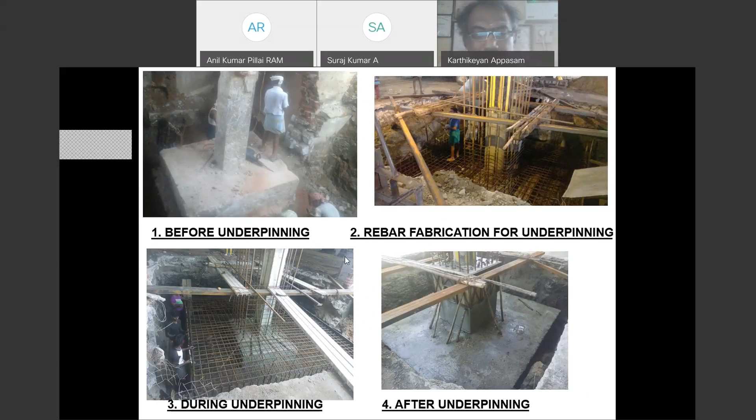So increasing the size of the foundation is one method of underpinning.

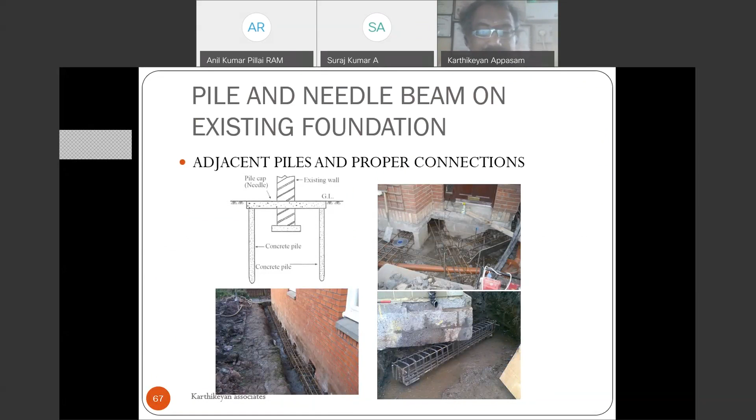Another method is putting piles near the foundations and needle beams on the piles, connected with the existing foundation. This is not an easy method - it's a very tough method. We have to prop all the structural elements inside the building, and then do it.

You may assume the screws we use in day-to-day life for carpentry work or nailing in walls - the screws are basically an example of micropiles. Like that, you can use piles for the structure also.

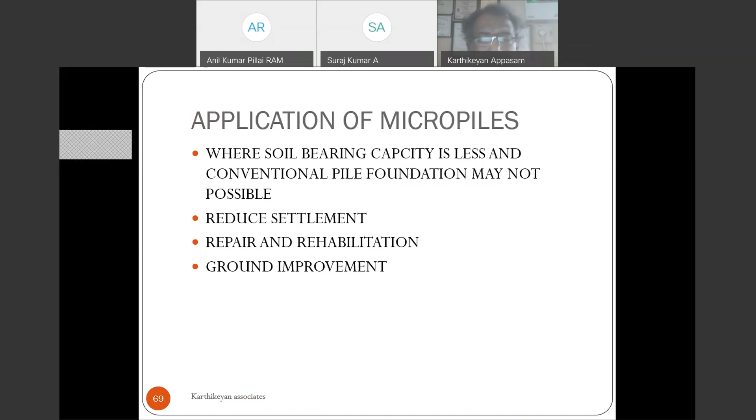Micropiles are very much used where soil bearing capacity is less and the building constructed goes on settling. You want to safeguard it, so there the micropile applications are more.

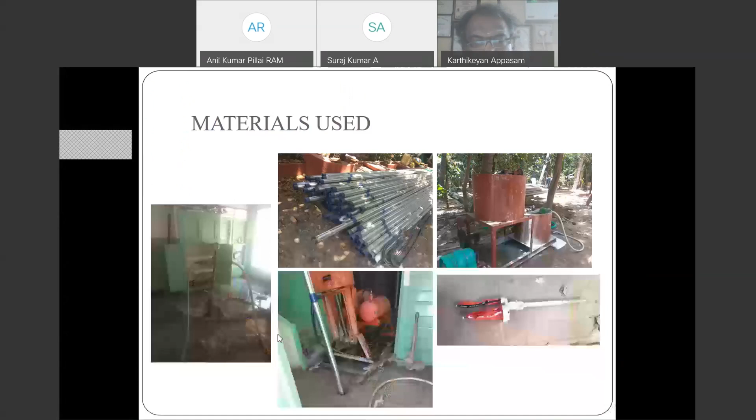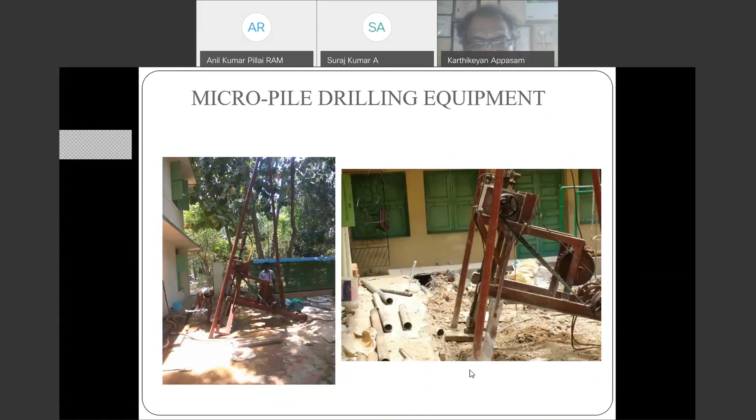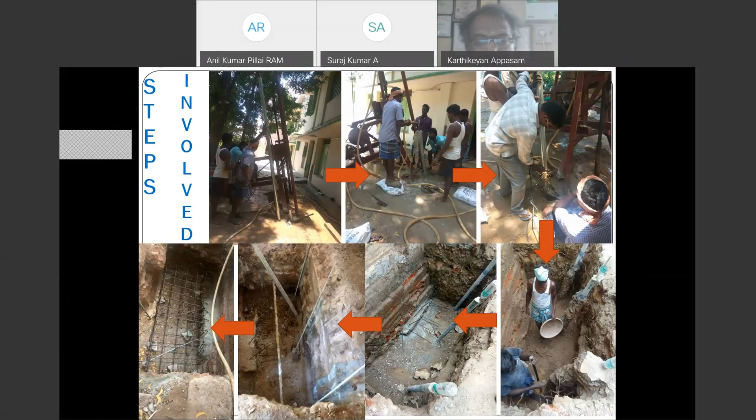With these examples, I come to the conclusion: foundation is the most important element in the structure. Even small mistakes, negligence, improper materials or methodology leads to catastrophic failure of the structure and costly, cumbersome repairs. Knowledge of foundation engineering, design and construction is emphasized for civil engineers.

Even when I was studying BE, soil mechanics and foundation engineering - geotechnical engineering - was a boring and tough subject. Structural engineering is still a tougher subject. Most of my areas were in structural engineering. But no pain, no gain - unless you pain yourself to understand the concept and work out the mathematics, you cannot get a good job. So no pain, no gain - all fresh engineers and all engineers should know this concept.

Ground improvement techniques prevent foundation failures. Ground improvement is a preventive method.

Underpinning is a highly skilled job. Underpinning is possible. It is a highly skilled job and a costly job. It requires strong knowledge and experience as well as expertise in meticulous calculations. Otherwise, if you go on underpinning without proper methodology, then the treatment may be worse than the disease. Sometimes a lot of mishaps and accidents happen.

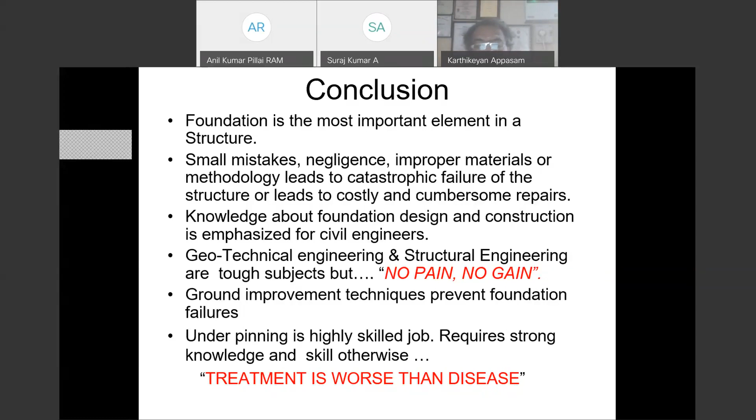dy by dx, double integrations, C and phi, gamma B. Lots of equations are there. Lots of intellectual content is there. But it is action oriented. You go to site, interact with the site people, read the drawing, and then improve the drawings, revise the drawings, again go to site, implement it. Sitting in AC in front of a PC is easy. Okay. So be action oriented.